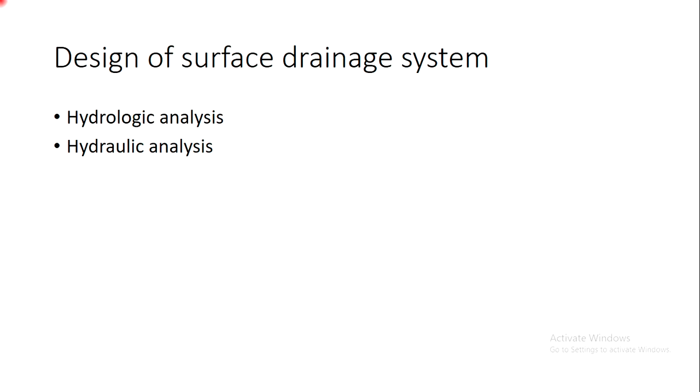Hydrologic analysis is usually done by using the rational formula, that is Q = C × I × AD, where Q is the runoff in cubic meters per second, C is the runoff coefficient which is expressed as a ratio of runoff to the rate of rainfall, I is the rainfall intensity in millimeters per hour, and AD is the drainage area in 1000 square meters.

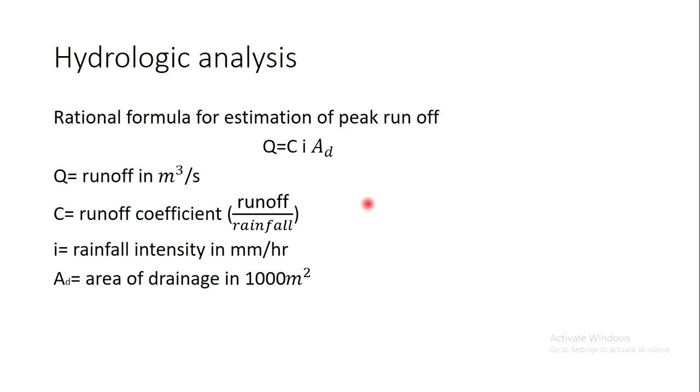Runoff coefficient. The runoff coefficient is not the same for all the surfaces; different surfaces have different runoff coefficients. For bituminous and concrete surfaces, the runoff coefficient is to be taken as 0.9. For gravel and water-bound macadam roads, it is 0.35 to 0.7. For impervious soil, it is between 0.45 and 0.6. For soil covered with turf, it varies from 0.30 to 0.55. For pervious type of soil, it varies from 0.05 to 0.30.

When the drainage area AD consists of several types of surfaces having different runoff coefficients, then the weighted average value is to be taken in the calculation of runoff. The weighted average is taken by using the formula C = (A1C1 + A2C2 + A3C3) / (A1 + A2 + A3), where C1, C2, C3 are the runoff coefficients of the corresponding surfaces and A1, A2, A3 are the respective areas.

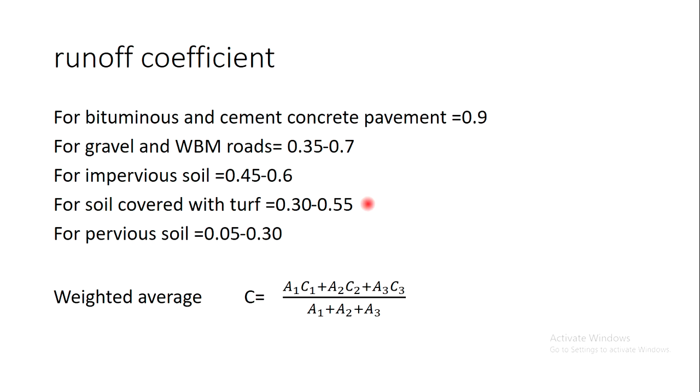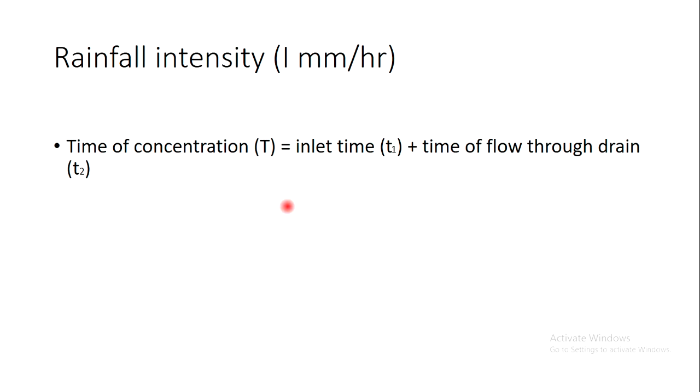Once we know the value of C, next is to find the value of I, which is nothing but the rainfall intensity. Before going to the rainfall intensity, it is important to know what is time of concentration. The time of concentration is the sum of the inlet time and time of flow through the drain. Let us see what is inlet time and what is time of flow through the drain. Inlet time is the time taken by the water particle to reach from the farthest point to the inlet of the drain.

This inlet time can be found by referring to this chart. In this chart, on the x-axis it is time in minutes, on the y-axis it is the distance in meters, and different lines are given for different types of surfaces and for different slopes. For pavement with different slopes, we need to refer to these lines. For bare soil with different slopes, these lines. For thin turf of different slopes, these lines. For average turf with different slopes, these lines. And on the y-axis, it is the distance from the farthest point where the water is expected to flow towards the inlet of the drain.

For example, the farthest point for the area under consideration is 200 meters in an average turf of 0.5% slope. For 200 meters we need to refer to this line, and for average turf of 0.5% slope, we need to refer to this line. Where this line touches this line is almost 41 minutes. So 41 minutes is the inlet time for this case.

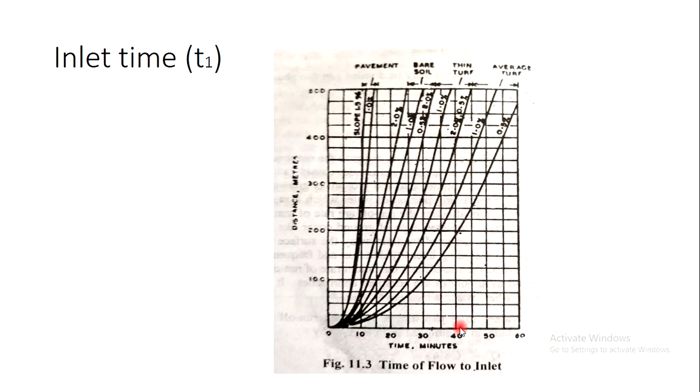T2 is the time of flow through the drain. T2 is given by L divided by V. L is the length of a drain, which is nothing but the distance between the inlet of a drain and the cross drainage structure, where V is the allowable velocity in the side drain. Once we know the time T1 and T2, we can easily calculate what is capital T. That is nothing but duration or time of concentration.

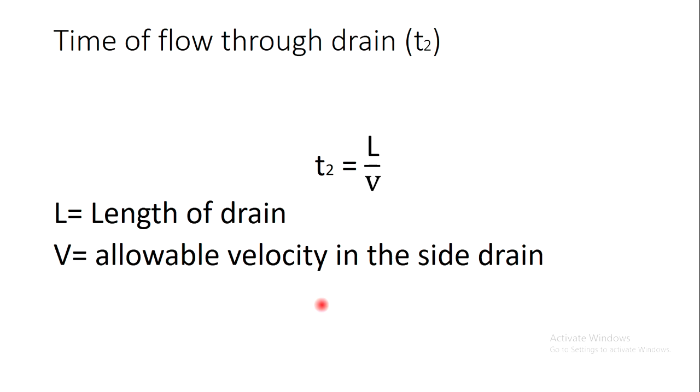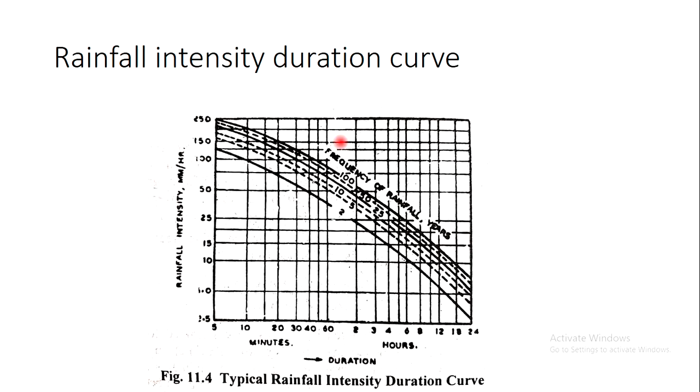Once we know the value of duration or time of concentration, and once we know the frequency of occurrence of rainfall, we will easily come to know what is the intensity of rainfall. Say for example, if 10 year is the frequency of occurrence of rainfall for 60 minutes duration of time, so it is almost 60 millimeter per hour is the intensity of rainfall. So once we know the value of duration and the frequency of occurrence of rainfall, we can easily come to know what is the intensity of rainfall.

Next is area of drainage. Usually the area of drainage is calculated by using the contour maps. By referring to the contour maps, we will easily find what is the area which is contributing the flow towards the drain. Usually it is expressed in 1000 square meters. 1 unit of area of drainage is equal to 1000 square meters. Here we came to know the value of C, value of I and value of AD. Once you multiply C into I into AD, we will come to know the value of Q, that is the runoff.

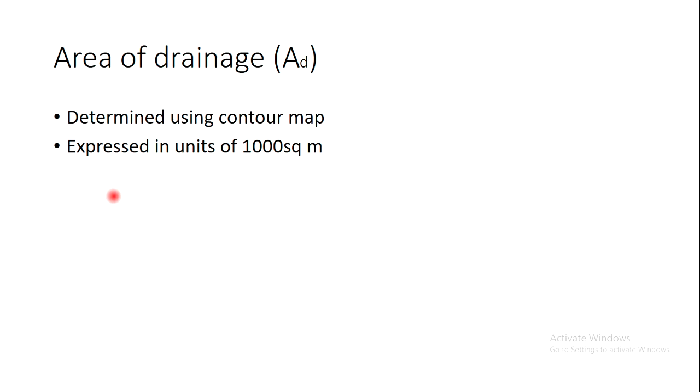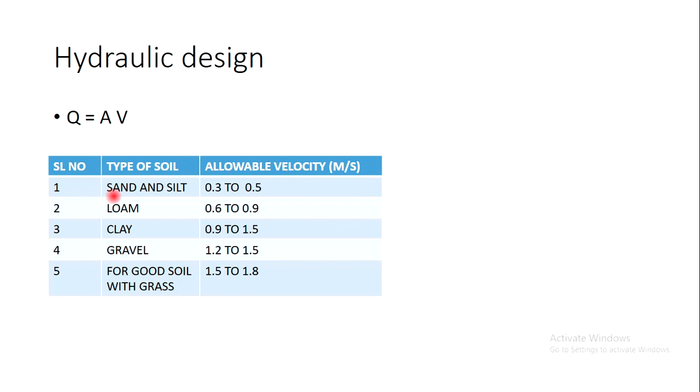The second part is hydraulic design. In this hydraulic design, we are using the basic equation Q is equal to A into V. That is runoff is equal to cross-sectional area into velocity of flow. Here the allowable velocity of flow is not same for all type of soils. For sand and silt, the allowable velocity should be in between 0.3 to 0.5. For loamy soil, it is in between 0.6 to 0.9. For clay, 0.9 to 1.5. For gravel, 1.2 to 1.5. For good type of soil covered with grass, it is in between 1.5 to 1.8 meter per second.

Next step is determination of slope. Usually, determination of slope is done by using Manning's formula. Manning's formula is given by V is equal to 1 divided by N into R to the power of 2 by 3 into S to the power of 1 by 2, where V is the average velocity, N is the Manning's roughness coefficient, R is the hydraulic radius. Hydraulic radius is nothing but the ratio of cross-sectional area of flow divided by wetted perimeter. S is the longitudinal slope.

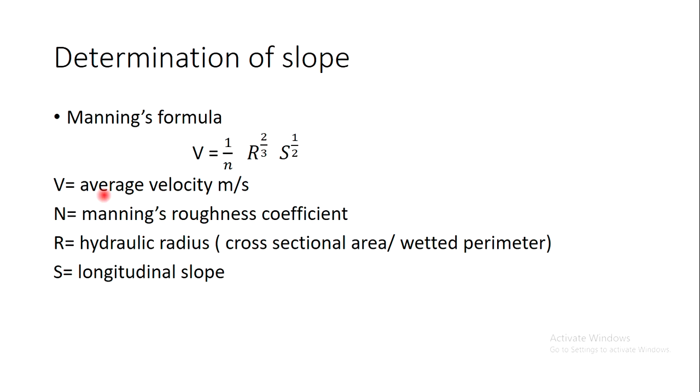Manning's roughness coefficient is also different for different type of surfaces. For ordinary earth, the Manning's roughness coefficient is 0.02. Earth with heavy vegetation, it is in between 0.05 to 0.1. For finished concrete surface, it can be taken as 0.013. For rough rubble riprap, we can take it as 0.04.